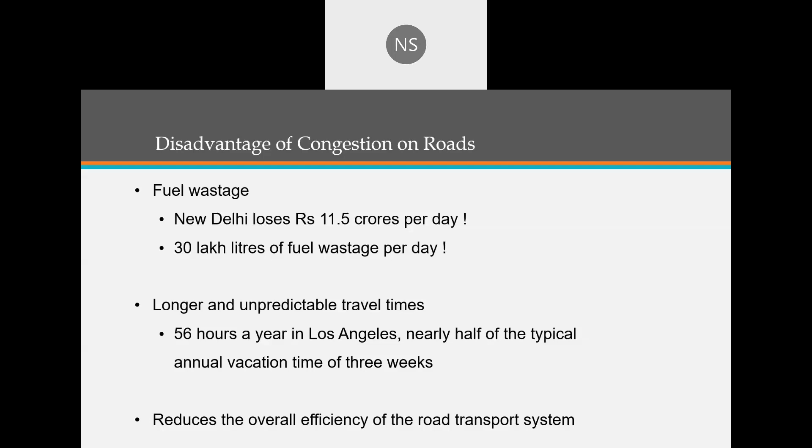So what it does is it overall reduces the efficiency of the road transportation system. Now, this is just a video. Let me know if everybody can hear the sound and see the video.

It's not audible. It is not audible. No, sir. Okay. But the video is visible, right? Yes, sir. Okay.

So it talks about 5 major cities of India and how much travel time occurs every day in the city, which gives you an example of how much time one person is spending overall on the roads.

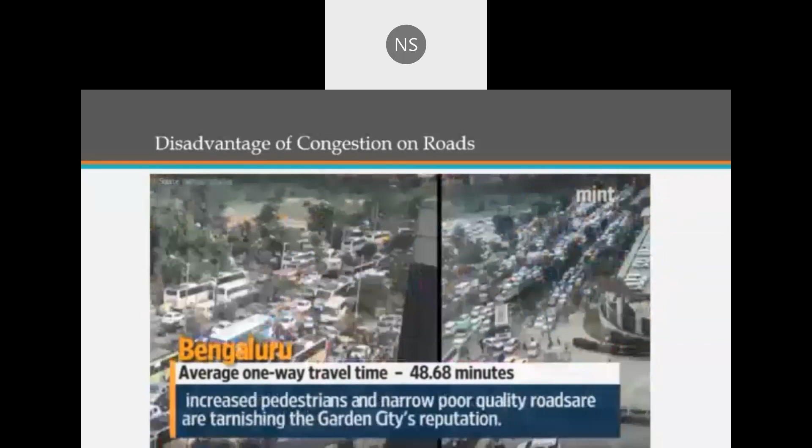From our office to our work location, this should not happen ideally, but the existing infrastructure is having a particular capacity.

We don't know how much demand is being generated and how much demand it needs to be catered through the infrastructure till now. But when we start utilizing intelligent traffic management systems, we very well get what my current demand on existing infrastructure is, number one. Number two, how much I require to add to the capacity.

Point number three, it utilizes the existing space available to its complete capacity value. So those numbers will give me what I need to plan for the next 50 years, which we used to do before as well, but those were based on certain probability models, which have their own limitations.

So this gives an overall picture on a real-time basis, and its advantage can also be seen in a lot of projects which are under implementation or already implemented inside or outside India.

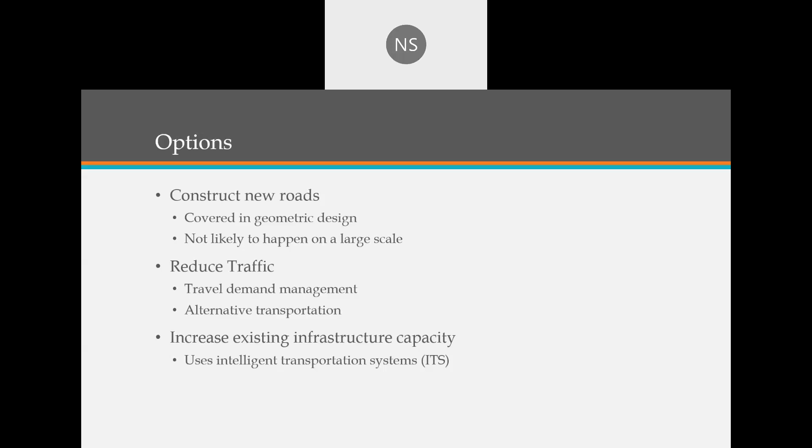Ultimately, it should be a combination of all three solutions: constructing new roads, reducing traffic, as well as increasing existing infrastructure capacity with the use of intelligent transportation systems.

This is just a pictorial view. Construction is part of the solution, but how? If you see, the value lies from 2 to 12 crore per lane kilometer to be built. These are some examples taken up from research.

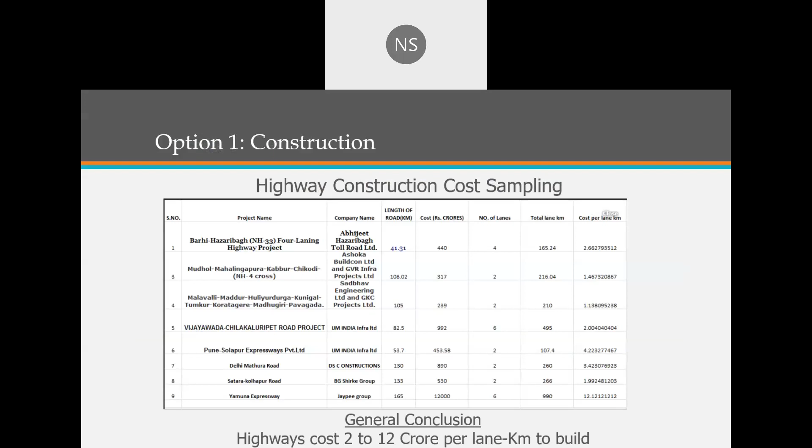Alternative solutions, alternate modes of transportation we are still utilizing, like Hyperloop, Skybus, all these help in mitigating the existing traffic condition or traffic congestion on the road.

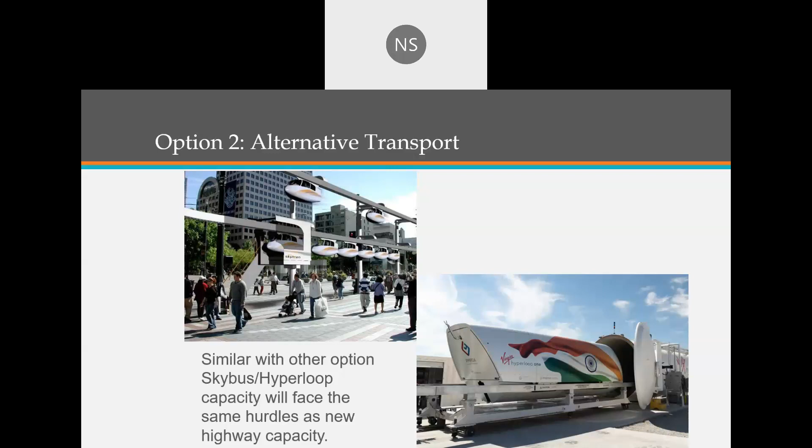Then ultimately the increase in traffic. So there's a small video. This is for Mumbai Airport. Let me give you a brief summary about this video. This is about Mumbai Airport and how the intelligent transportation system is helping utilize the existing capacity of a runway.

Mumbai doesn't have parallel runways because there is a limitation of space. What it offers to the operating agency is a crisscross landing surface. So even when we don't have parallel landing tracks at the airport, with the help of intelligent transportation management system, it still helps in increasing its capacity and utilizing it to the fullest volume.

Let me know if everybody can hear the sound. Otherwise, I'll play it in video mode.

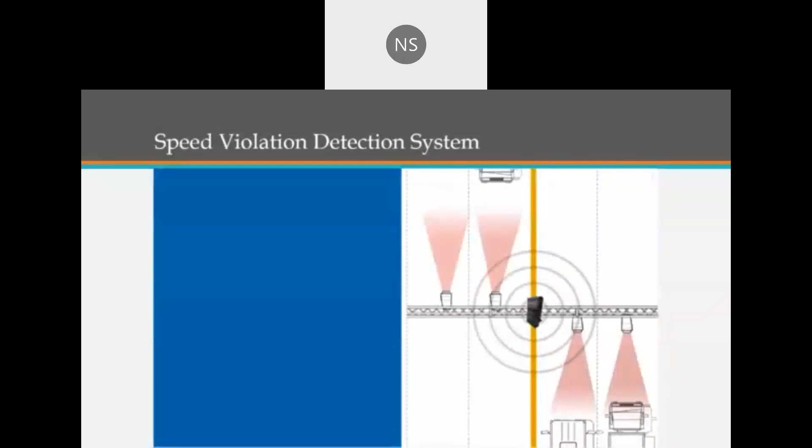So this is how radar and surveillance-based systems are clubbed together. Radar detects and emits frequencies every second, and when it strikes the vehicle, it gives the classification, speed, and elevation of the vehicle. These three axes provide the elevation, speed, and azimuth of the vehicle, so that classification can be done accordingly. Once it's detected that a vehicle is going above the speed limit provided at a section, the captured image, with the help of the surveillance camera, is displayed on the screen of the traffic officer, and based on those details, he can challan the vehicle at the same time.

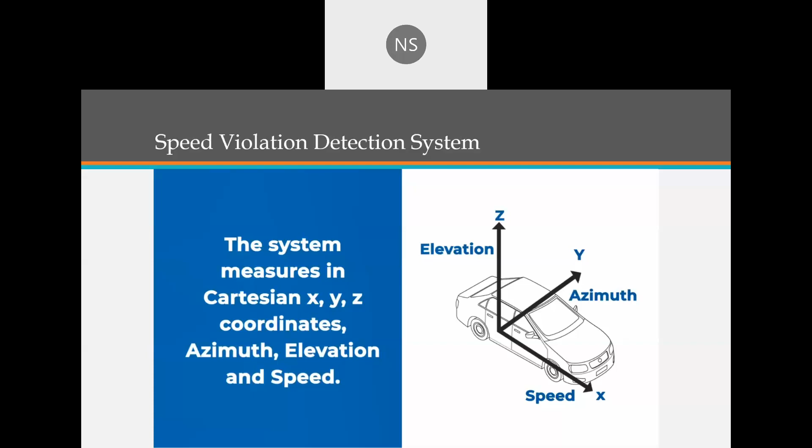On the dashboard, it identifies those vehicles and gives a color showing what kind of lane change detection has been generated. Based on that lane change shown on the dashboard, the traffic officer sitting in the command and control center can take appropriate action. In all these cases, the traffic officer's role is very important because, as per law, the power is provided to them.

But there are some cases in the country itself wherein the traffic officer's involvement is omitted and the system automatically detects the vehicle, generates the challan and sends it to NIC for challaning. But there are some use cases which need to be identified. For example, this system's overall efficiency reached 95% to 97%. There can be a case that a vehicle was not exactly a violator, but its challan is generated.

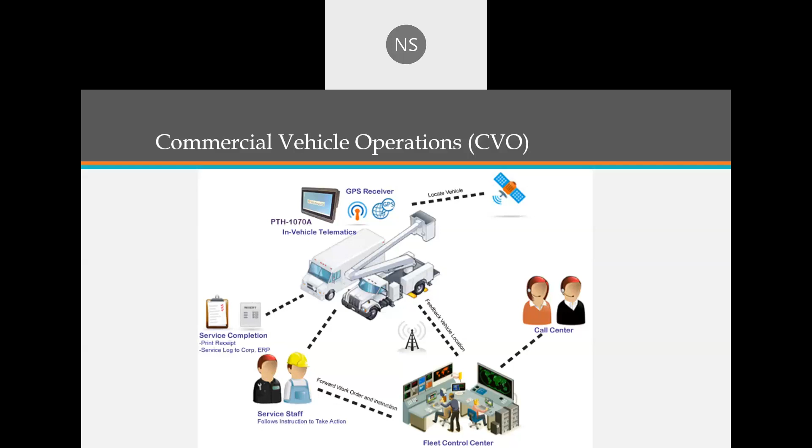This is a kind of functional area wherein weighing in motion is used, wherein vehicle weight information is utilized with the help of weighing in motion sensors. So if you see in terms of vehicle category, these are the different information detector services provided on trucks or different vehicles. Automatic equipment location, automatic equipment identification, onboard computers, vehicle system monitors, accident avoidance systems. So it is also coming in some private vehicles now, wherein certain limits can be

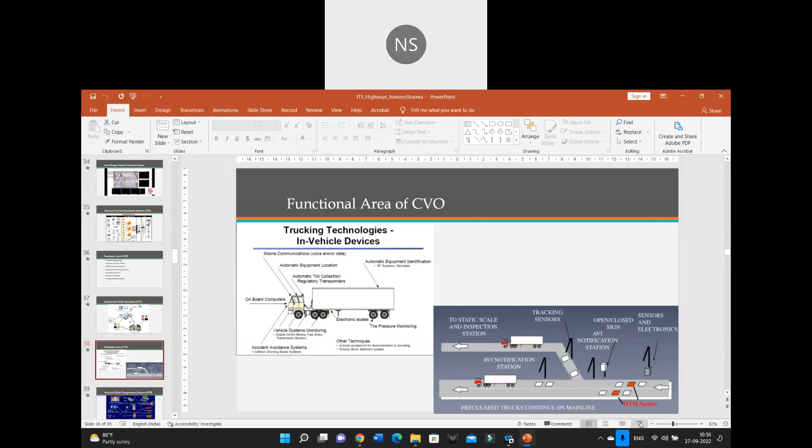Yeah, I guess there is a question. I'll just take that question right now. This has been raised by Mr. Srinivasa: can we synchronize an individual or group of vehicles, like a roadways navigation system, to the highway monitoring system? Definitely we can do it. It depends upon what kind of use case we want to generate. I'll just give you a small example.

You know that at junctions, priority is provided to ambulance services or public transportation. There are certain parts of India where it has been implemented. The junction controller has a particular RFID sensing device. Whenever there is public transportation in the queue, and if it is on the left-hand side of the carriageway, priority is provided to that lane for public transportation to pass. Similar with ambulance vehicles. Ambulances are fitted with a particular kind of RFID tag or frequency tag. Whenever the controller senses that, it opens up and provides priority to the vehicle.

So it depends upon what kind of use case you want to generate. Integration is not an issue. Integration is possible, whether it is an individual or a group transportation service, we can do it. I hope I am able to answer your question, Mr. Srinivas.

Then weighing in motion can also be utilized on the main carriageway, where all categories of vehicles operate. A particular vehicle may cross the permissible limit provided for it, because it has been categorized with the help of surveillance cameras and the vehicle number plate. And we have a database coordinated and integrated with Vahan or Sarathi, which provides the actual value of tonnage a vehicle can take.

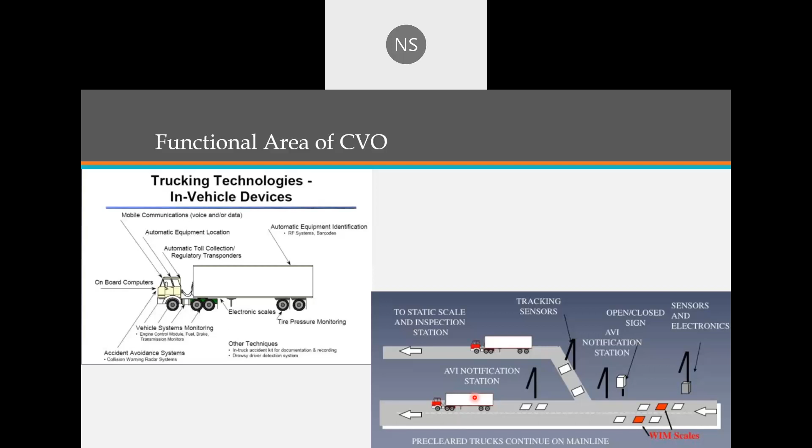Similarly, the same can be done for advanced public transportation systems as well, wherein information is collected from the ground, just like I was talking about the priority of public transportation at junctions. It identifies that a public transportation vehicle is coming towards the signal, and it gives priority to the public transportation system. Similar to that, we can also have similar services for ambulances, wherein emergency services are catered to.

Now, when we talk about advanced public transportation system, what can be the functional area? One of the functional areas we talked about is it can be providing priority at a signal. Similarly, that public transportation information in the form of GPS can be utilized for the display boards. So, for example, there is a bus stop and there is an information board which is being provided over there. So those locations of the buses can be integrated with the help of the control center to those display boards.

So if a particular bus on a particular route is located somewhere, the display board can detect that the arrival time is in 5 minutes. This is the kind of service which can help the stakeholder to utilize those services and cater to the demand of that area in a better way. Similarly, this is again the example where a transponder and antenna is being provided at a traffic signal, which provides priority to the vehicles of public transport.

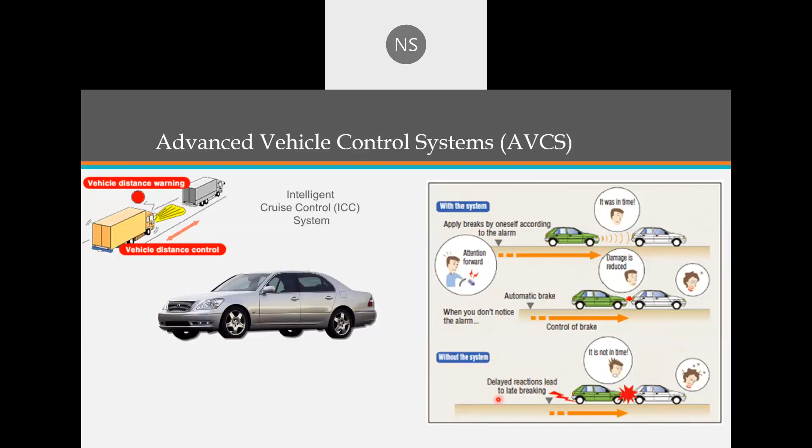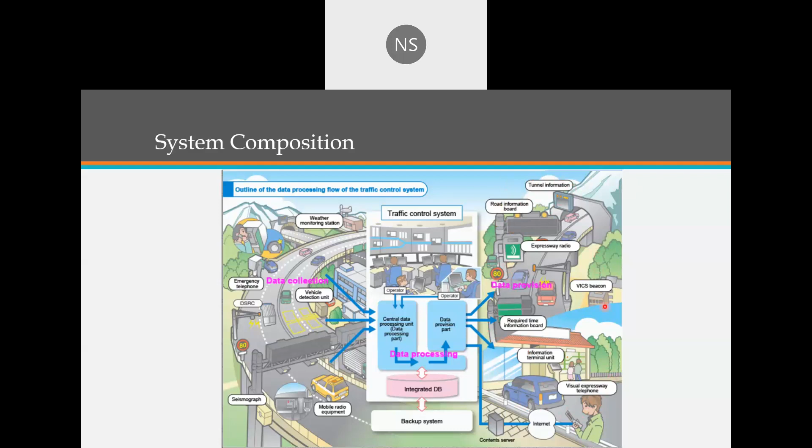Then based on that, we prepare a high-level architecture wherein we say we require a parking management system. To have a parking management system, we require detection based on maybe neural network, maybe magnetic field devices, maybe a camera-based solution, so camera will be required as a detection point. Then the network connectivity from the detection point to the control center, so that information can be collected and processing of data can be done at the control center. Finally, how that information will be utilized for betterment and efficiency of transportation infrastructure.

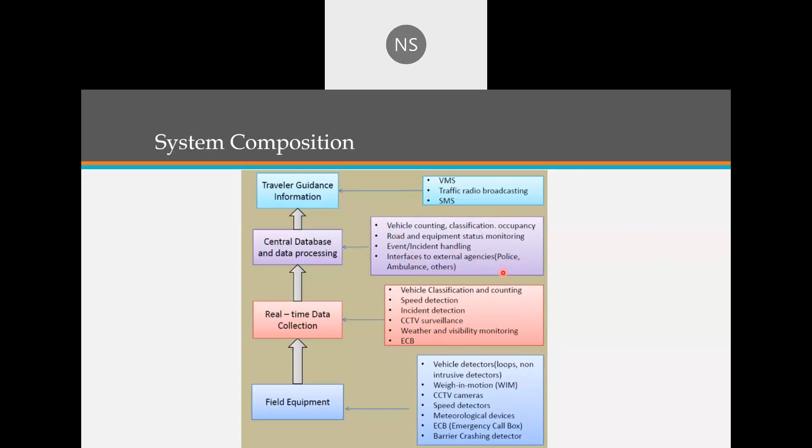Now, the overall system composition - these are the detection points from where information is being collected. Here you see there are different solutions being provided. One is the weather monitoring station, which provides information related to environment management, what kind of temperature, what kind of rainfall is being observed around the influence area.

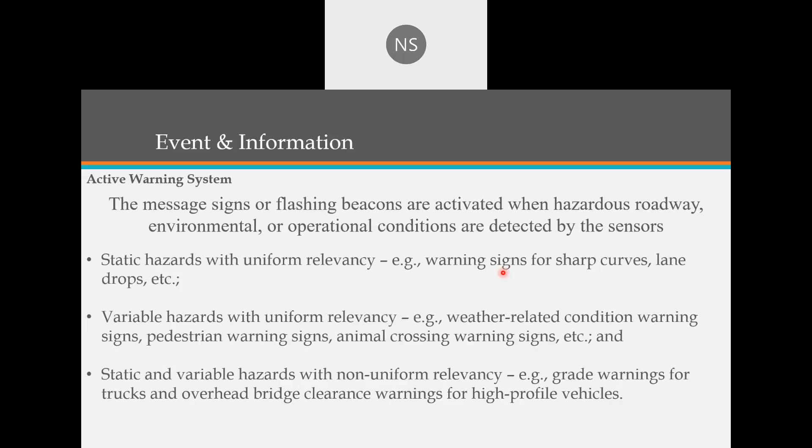Then that information, based on certain collection devices like vehicle detection units, emergency telephones, ECBs, is collected and passed on to the control center. The control center processes the data with the help of applications, with the help of on-premise or cloud-based solutions provisioned in the system. Based on that processing of data, the information is passed on to the various information dissemination devices across the utilization of your system. So this is how the complete system is drawn.

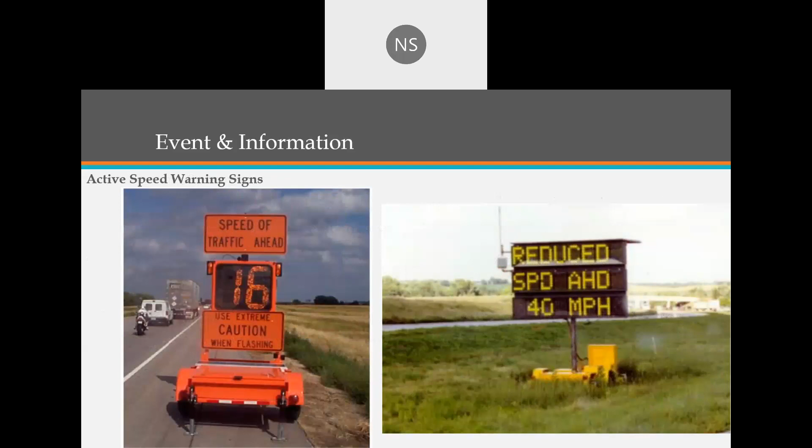Similarly, this is the complete high-level architecture, which covers the field equipment and real-time data collection happening through these field devices. That information is processed through database, application, and servers, and then passed through to the traveler for better utilization and efficiency of the transportation system.

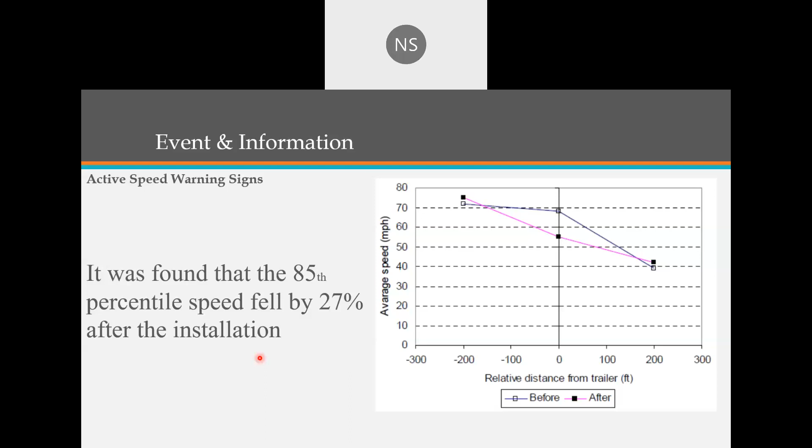Okay, so here I want to talk about a particular example of what kind of event I want to cover, and whether that event needs to be linked with an active warning system or a passive warning system. In this case, we are talking about the active warning system when we are collecting the event and information. An active warning system is basically an adaptive system in which any kind of information can be displayed. For example, when you talk about a static hazard with uniform relevancy, there may or may not be required a particular adaptive system in which information displayed only relates to a particular instance - for example, static hazard and uniform relevancy can be a warning sign of sharp curves or lane drops, etc.

So this is a particular kind of instance and can be done with the help of a static message information provider system. Then there is variable hazard, wherein different information needs to be clubbed in a particular system, which can be related to changing weather conditions, temperature, pedestrian warnings, and animal crossing warning signs. These can be variable kinds of hazards, with known and uniform or non-uniform relevancy.

Then it can be a clubbed one, wherein the static hazard and variable hazard both are clubbed with a non-uniform relevancy. For example, there is a certain change in the grade or profile of a highway, or a clearance warning provided for larger vehicles crossing a bridge. So your event and information should be defined based on what information you want to collect from the ground, whether it is uniform, non-uniform, static, or variable.

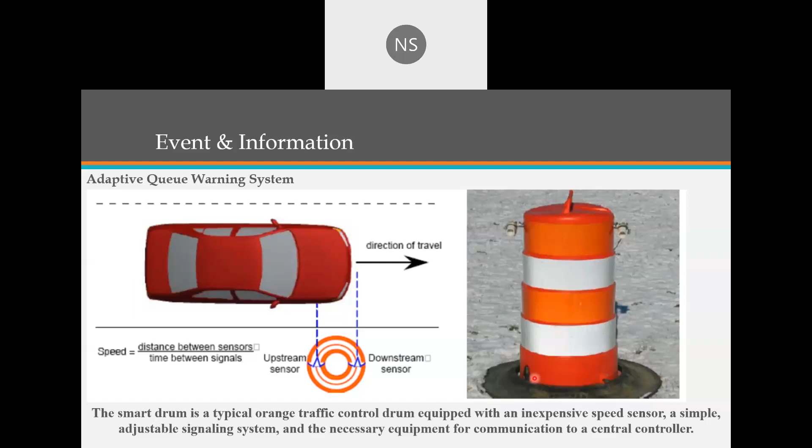If we see the example of active speed warning signs, it was found that in most cases the 85th percentile speed fell by 27% after installation. So this is not only about violation challans - violation detection itself helps in decreasing the probable issues that would be caused unless these information systems are deployed on the ground. This becomes a very good example and helps the authority decrease violations even without integration with the challan system.

There is another system which is an adaptive queue warning system. This is related to a construction zone on the highway, and we want to have an adaptive queuing warning system which helps in better management of the queue on the highway.

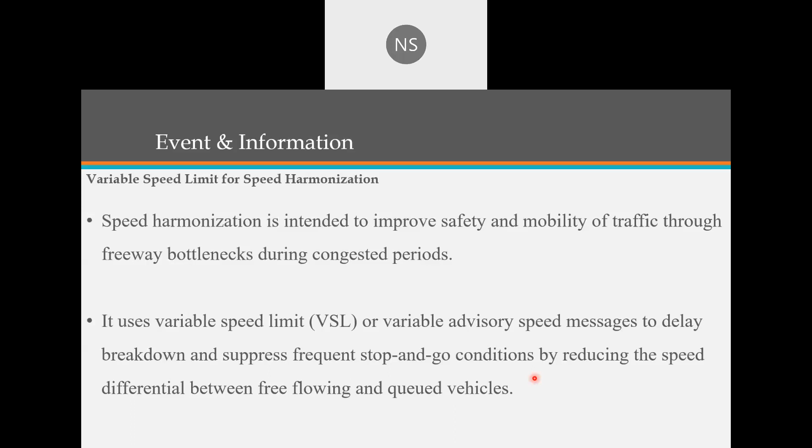So in this case, I divide the section of road where construction or hazardous activities are happening into certain sections, and put certain beacons which help detect the speed of the vehicle, then decrease vehicle speed with the help of certain signs provided on the ground. In this example, it has been divided into 3 sections of 1200 to 1500 feet each, with particular speed limits derived for the system, asking the vehicle to harmonize its speed.

When displays are provided indicating it's a construction zone and the lane is getting skewed at a particular section, the vehicle itself manages to maintain and manage the queues inside those sections. This is an example of how construction zones can be handled aggressively to decrease congestion times. As we said earlier, 1 minute of congestion adds about 4 to 5 minutes of clearance time. So this helps decrease that clearance time and better manage the queues built up because of any event or accident on the ground.

This again shows those beacons, how they can be utilized, how upstream and downstream sensors can be detected with the help of beacons. All this can be managed through this example, wherein sample data and signaling data are mixed with the database in the control center, and utilized with the help of the detection system on the ground. With the help of that detection system, the event or particular case can be managed.

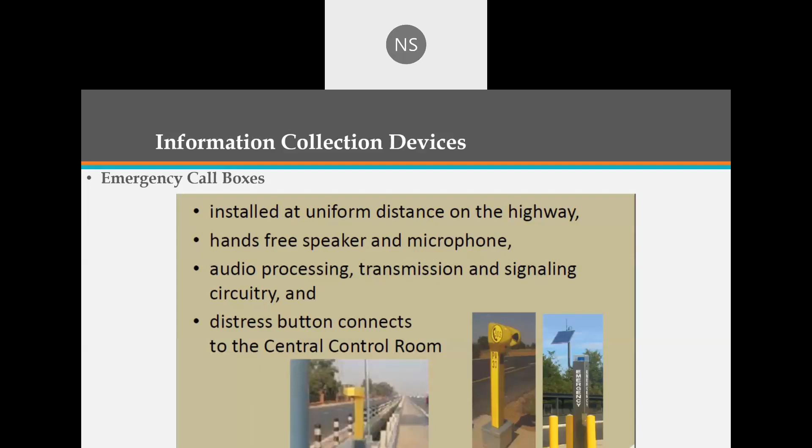This helps in detecting a particular incident or accident if it happens. The algorithm is configured so that if a particular vehicle is standing at a point for longer than a prescribed limit, say 15, 20, or 30 seconds, there is some issue related to it. That is how the algorithm detects it, takes images of that incident point, and pops it up on the system for the control authority to see what is happening. That is one example of how detection happens.

Based on that data or visual image collected at the control center, the quick emergency response team can be configured so that they can reach the spot and provide the particular emergency service required by the users.

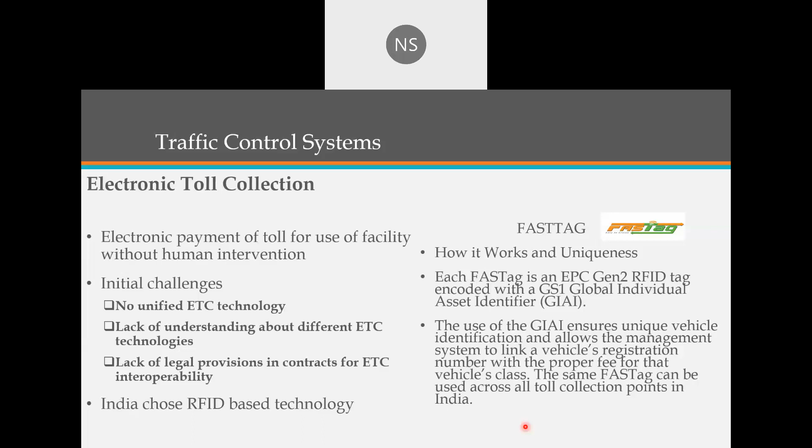It includes a scatter visibility sensor, which tells you how much visibility there is on the ground, so that it can link with the system. Then pavement lights installed at 100 feet spacing, so that they signal that something is happening and you should decrease the speed of the vehicle. Then there are adjustable street light controls. There are CCTV cameras. There are illuminated DMS provided on the pavement itself, which get illuminated through control done at the control center.

Then the remote processing unit, control center, and fiber optic cable to communicate between each of the systems deployed on the ground and the control station.

Then we also have electronic toll collection. When we look at what was there before electronic toll collection came into the picture, we chose FASTag as a system. The challenges were that there was no unified technology. One highway or expressway was working on one set of technology, and another was working on a different set of technology.

Also, there was a lack of understanding among the managers who were managing the highways and expressways about ETC technology: how it works, how it helps in getting the exact value for highway management, and therefore making the project more sustainable compared to other projects done with government funding.

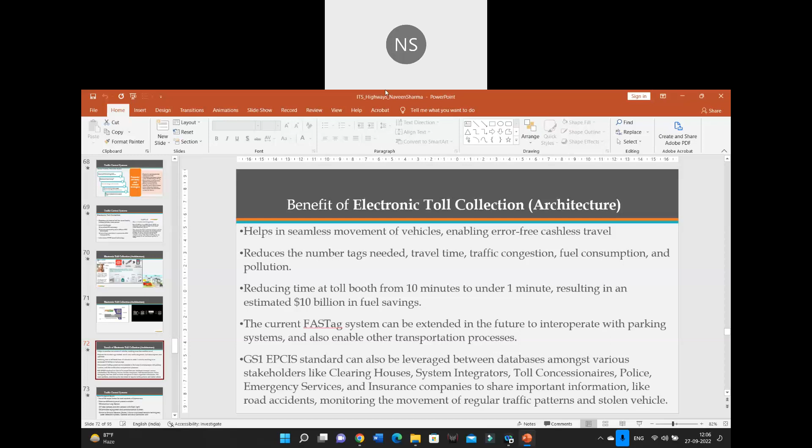So there are two kinds of setup. One is the RFID tag, which is a transponder. Basically, when it comes into contact with the RFID reader, it provides a particular ID and details related to the vehicle which is plying on that toll point or highway. Then a host terminal or information database, which is provided with details related to the host terminal, highway, middleware, computer and software.

Then the FASTag data is read by a FASTag reader, and the information is passed to a host terminal controller, which lifts the toll gate to let the vehicle pass. And on the backend side, it is linked with a payment system.

So a toll plaza has a particular ID related to the FASTag ID collected from the vehicle. That information is passed to the acquirer, and the acquirer contacts the NETC, which is an online switch and mapper providing information related to the bank or payment details of the issuer, and that payment gets deducted when a vehicle passes through a toll point. I guess this is very well known to everyone, so there's no point discussing it further.

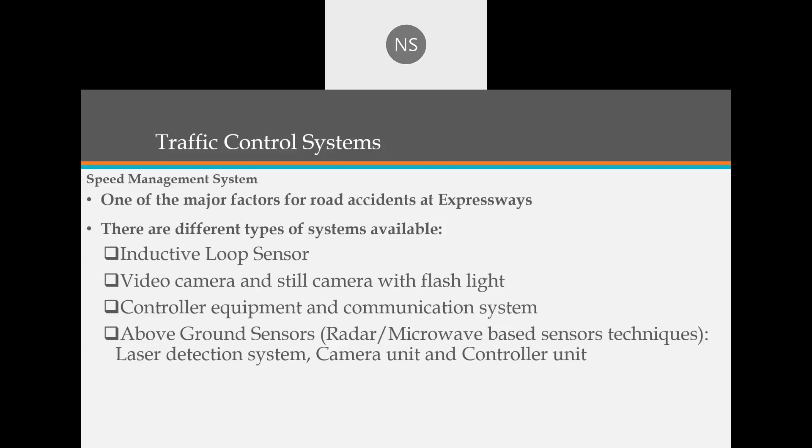And that physical barrier has been replaced with a foolproof system, which captures the details of vehicles and collates and takes out the payment which is required to be deducted from the users who are plying on the road.

I'll just stop here and see if you have any questions related to this section. Any particular question, if anybody has one, can be taken up here. No questions? Let me see if any question is there in the chat box. Shall we go ahead? Neeraj, are you there? Yes, please. Yes, sir. Sure.

Okay. So till now, I guess we have talked only about the information collected from detectors and sensors. Let's now talk about the traffic control system. The traffic control system also depends upon your requirement. For example, let's talk about the speed management system. It notes down the speed of the vehicles plying on the road and manages that speed so that the vehicle does not get into a fatal accident because of the speed it is running at.

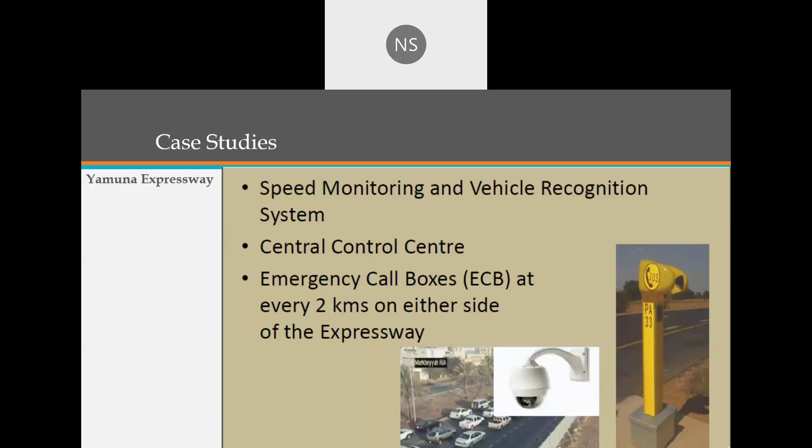So this acts as a kind of control system. So how does it help? For a control system, we require different kinds of systems. In terms of speed, there are different systems available on the ground. It can be in the form of inductive loop sensors, video cameras with stills or flashlights, which we discussed earlier as well, then controller equipment to communicate with the system, and sensors which note down your speed from the ground.

So again, the system is similar, in that it collects various information related to vehicle speed and passes it on to the control station. Then the control station has a database which tells them that this particular speed is, and that information has been collated from the data present in the database. So that particular section has been provided a particular speed limit, and that information is related to a section, and it shows if the speed is above or below the speed limit provided at the section. The same method is being utilized here as well.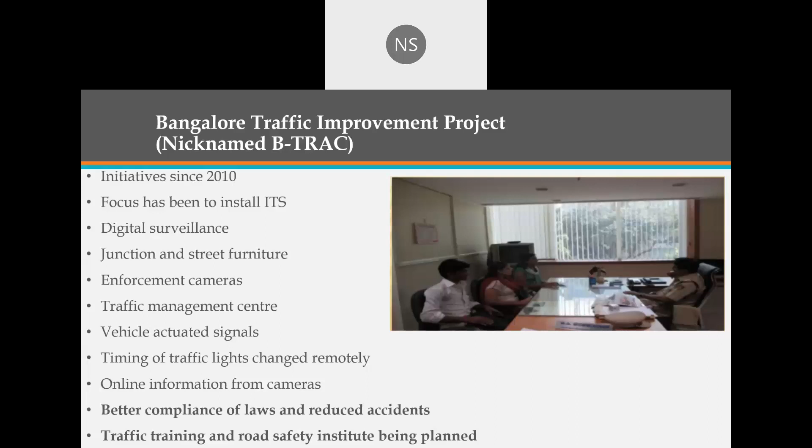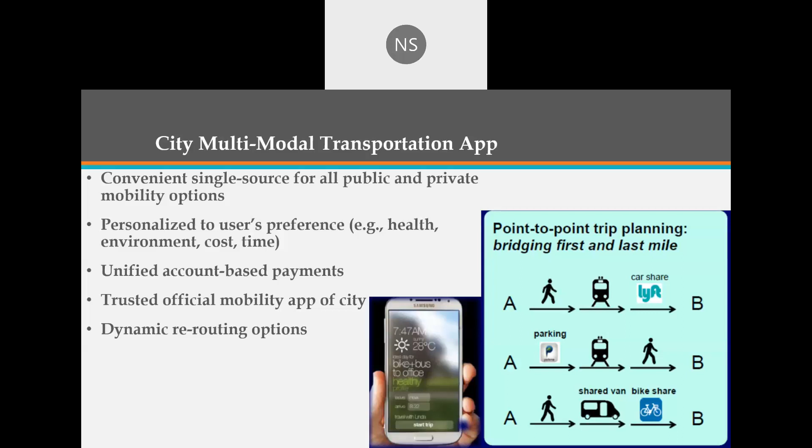The real-time information for passengers about bus arrival and departure has been provided, reduction in waiting time, increase in demand in the public transportation. So people were more informed about bus services. So that's why they were using it very often, because they were on time and they were actually reflecting the real-time information to the users. This also helps indirectly in reduction in traffic congestion, improvement in efficiency of traffic operations throughout the city.

Congestion level is decreased, then ultimately it helps in better environment quality, reduction in fuel consumption which is being utilized by the bus transport, and then improvement in economic activities of the services.

This is again one of the first projects which was taken up in India, which was B-TRAC. This was by Traffic Police of Bangalore. This initiative was taken in 2010, and focus was on installing those intelligent traffic management ITS devices, doing a digital surveillance of junctions, street furniture. Various enforcement cameras were also installed.

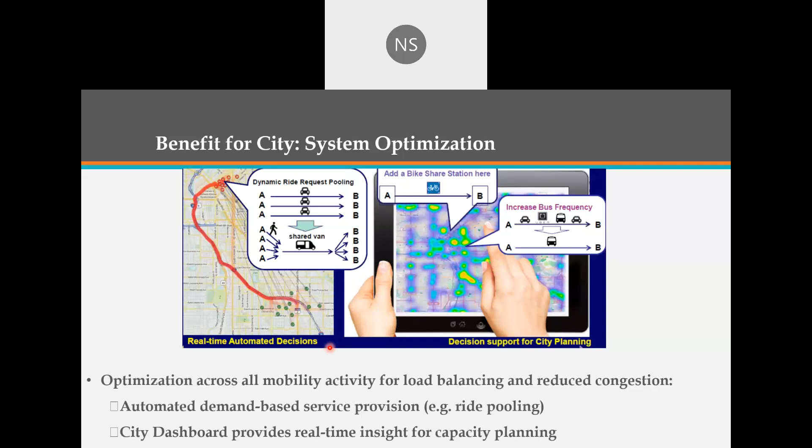Then there is a traffic management center which has been built, which is controlling all those detection devices on the ground, which are there at junctions, at the various corridors. Then online information from cameras is collated and controlled in the management center. Better compliance of laws and reduced accidents was one of the benefits from this system, and traffic training and road safety institutes are also being planned based on this to bring down road accidents and for capacity building of the department.

They have also developed an app, which is actually helping them in one-point integration and one-point information for various kinds of transportation systems. So it provides a single source of all public and private mobility options to users through a mobile application. A unified account was created, payment was also being deducted through the application, and various dynamic rerouting options were also provided to users.

So this is an example that in case those integrated services are not being provided, then how the system will work. And in case those services are being provided, then how that system can be utilized better. So if you see my example from A to B, right now there are a lot of trips which are happening through the car.